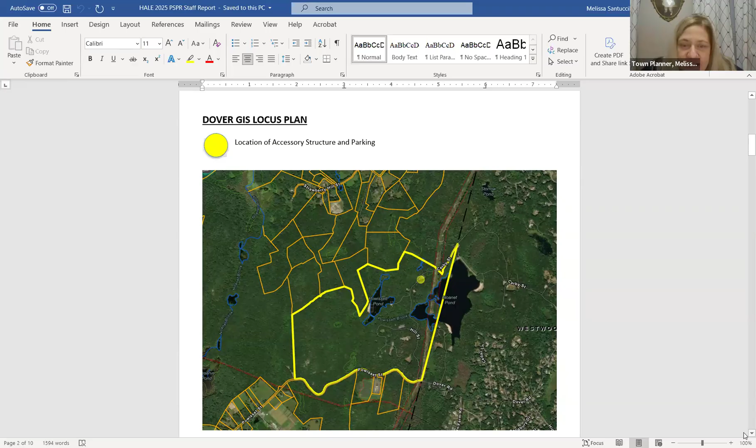I've included here in the report for everyone, it's such an expansive property. There was a lot of information in the application materials circulated. If you can see on this page, this yellow dot is the general area where this particular project is going to take place.

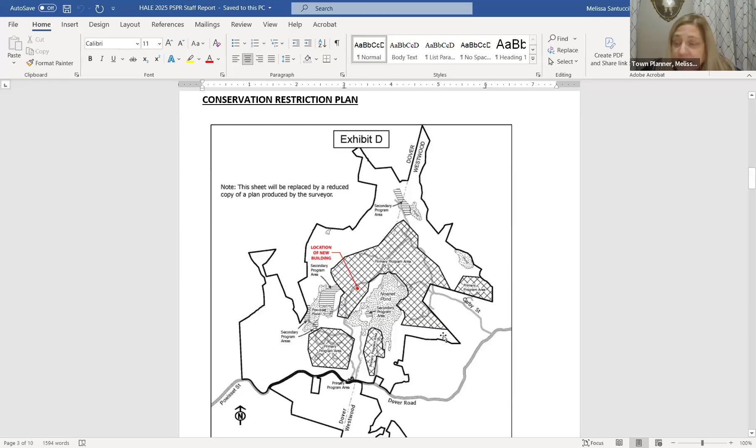Also included here, there's a lot of talk in the community about the conservation restriction, something both Hale and the community of Dover and Westwood are focused on. This Exhibit D is right out of the draft conservation restriction, and you can see I've asked them to highlight the location of the new building, which is in the primary program area. There are areas restricted as typical conservation restriction area, and others described as primary and secondary program areas, all highlighted here on this plan.

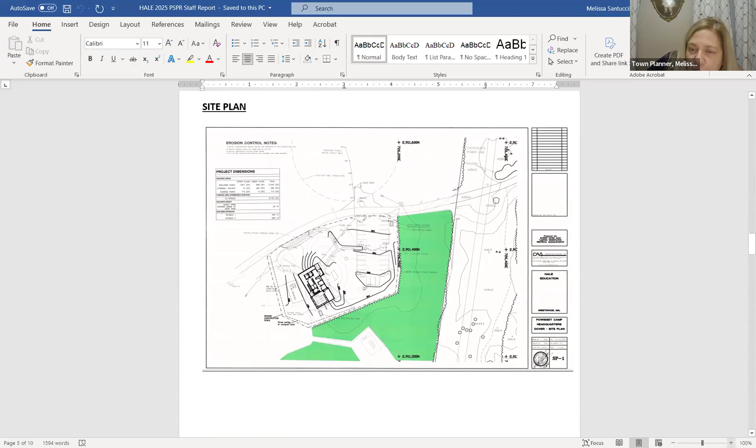This document, also provided in the packet to board members, is essentially the site plan. Over to the right you can see the Eversource power line easement for reference of location, and this green area here will remain the tree line and untouched. We have the 23 parking space area here.

Initial discussions were about gravel, but they may in fact pave that area, and they've provided drainage if they decide to pave. I did some rough calculations on coverage for this parcel, which is over 300 acres, and the increase in lot coverage was 0.000 - so de minimis, not even worth including in any analysis given the expansive area.

We have a series of walkways. Handicap and ADA access has been looked at in detail by the engineer to get up to the building, which you'll enter on the first level, about 2,000 square feet as I described earlier. Then the back area here, you enter into the lower level.

They're hoping to not have to remove any trees, though there could be slight tree removal in the field, or slight shifting of the footprint to avoid removing trees. However, there is no clearing proposed in the setbacks of the lot. The closest property line to the north is about 520 feet, and to the south it's well over half a mile - very interior to the piece of property we're looking at this evening.

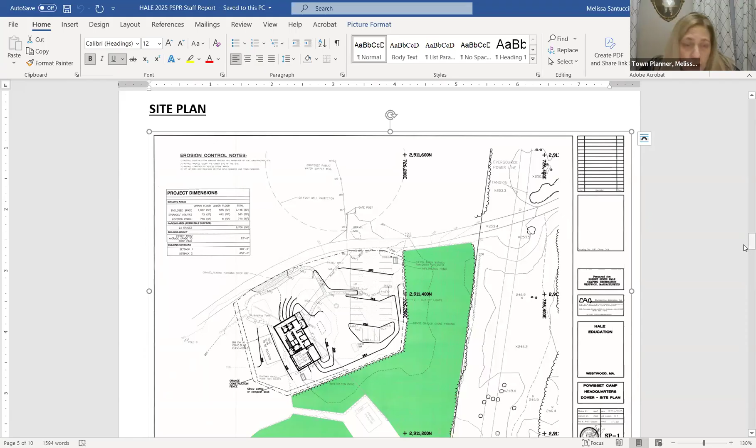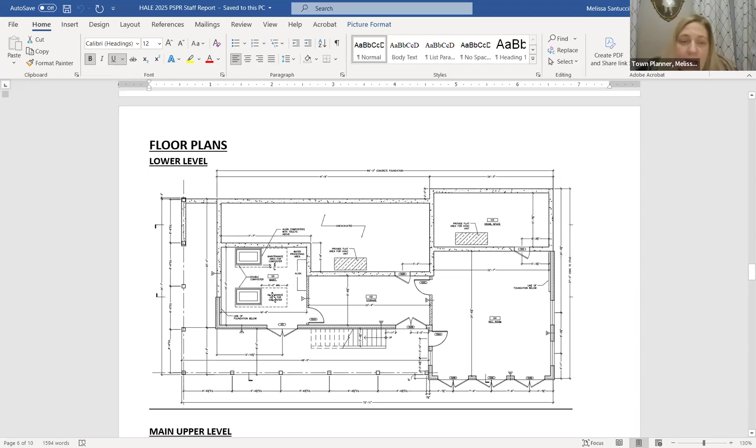We also have to talk about the floor plans. This is the lower level, with some unexcavated areas and a crawl space. We have a rec room down here on the right with beautiful barn doors that open onto the property, a storage area, and a utility area for the composting toilets they'll be using inside the building - another green eco technology that's part of this project.

We have the main level here on the second floor plan, with the main entrance into a reception area. We have offices for staff and counselors, a small conference area, the infirmary, some storage, and the lavatories I spoke about earlier. So a pretty small building, not a lot of wasted space, very efficient layout. The architect's done a great job addressing the needs of the facility at this location.

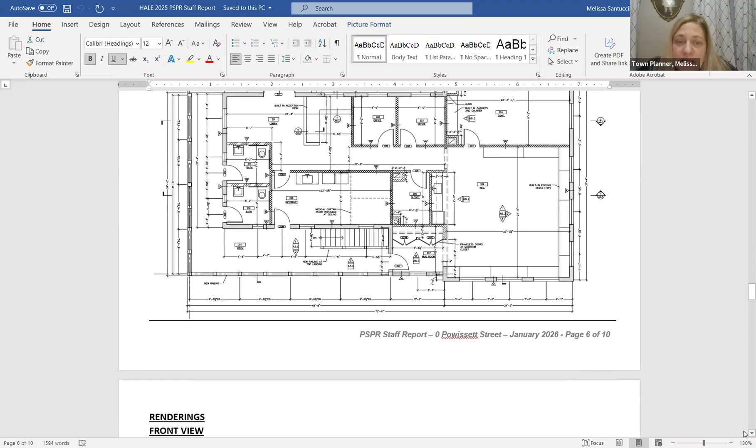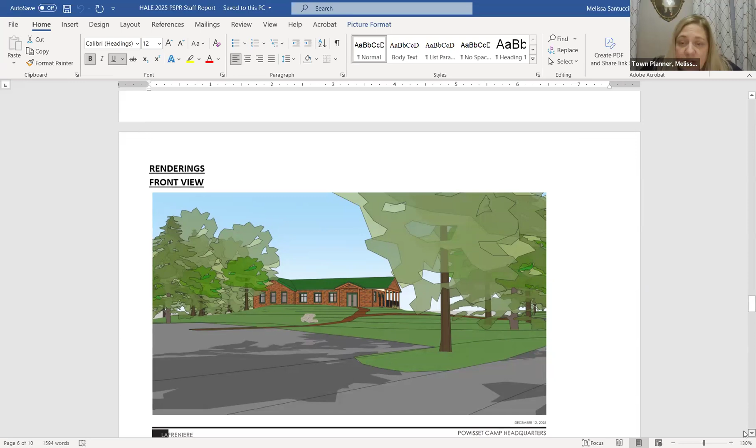And then really the showpiece is the renderings - log cabin, absolutely beautiful. This is the front rendering, as if you're coming into the parking area, where you'll enter into the main level of the building. We also have the rendering in the back with those entrances and nice barn-style doors for the recreation area, whether it's gathering or activities with the kids, nice and open with a lot of fresh air flowing in through there.

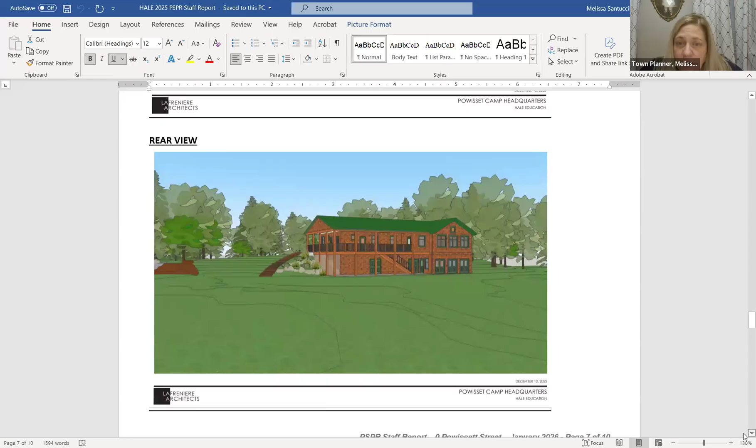So, wonderful job on the elevations. And then we get into the findings, which are straight out of the zoning bylaw. These things take into account compliance with the bylaw.

As noted previously, we're looking at a 300 or so acre parcel. There are no concerns about coverage. The building meets the height limitations. Parking is sufficient in accordance with the 1 space per 100 in our zoning bylaw. Lot size, obviously, very oversized lot. A lot of the things that would come into play given the size of the property are essentially non-issue, compliant, and meet and exceed any dimensional criteria.

The second set of findings the planning board looks at is the location of the driveway openings in relationship to street traffic, convenience, safety, pedestrians, bikes, any way anybody would be getting in and out of this particular place. I had looked at some maps, and correct me if I'm wrong, but I think you'd get on Carby Street in Westwood and make your way onto something called Brune Way that showed up on one of the plans. That's essentially how you'd get here. This particular building is located in the parking area off of Brune Way.

Again, sufficient parking in this area. It's likely to see a small increase in pedestrian, bicycle, and vehicular activity to this particular location on the site, obviously, with a new building and new parking. However, there aren't really any concerns about creating any unsafe or inconvenient situations. It's very interior to the property, not a situation where we have multiple curb cuts or multiple people trying to access different locations in this area of the site.

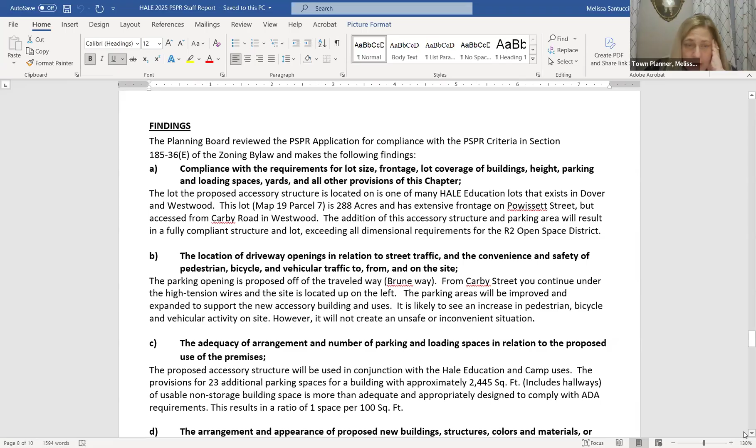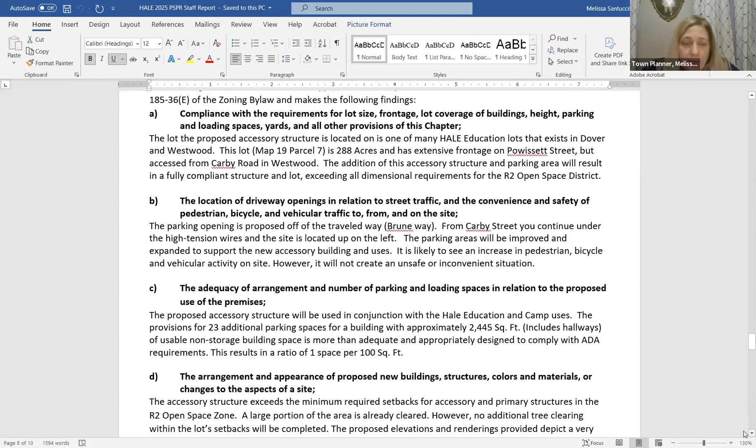The proposed accessory structure, in conjunction with the Hale Education and Camp uses, provides for 23 additional parking spaces. I did some quick calculations, and while the total square footage is over the 1 per 100, we typically don't park for storage areas and things like that. So 23 parking spaces is more than sufficient for this size building in accordance with our bylaw.

The next set of findings is the arrangement and appearance of the proposed new building structures, colors, and materials. As we showed in the renderings earlier, the building is beautiful, essentially a log cabin type of appearance, very in keeping with the camp and natural theme we have going on here. The area in question is a great area for this building. A lot of it has already been cleared, and they're using the topography to their advantage to build the building into the slope, taking advantage of removing fill, cuts, and grading. So great location and good site design, both from the architect and the civil engineer on this one.

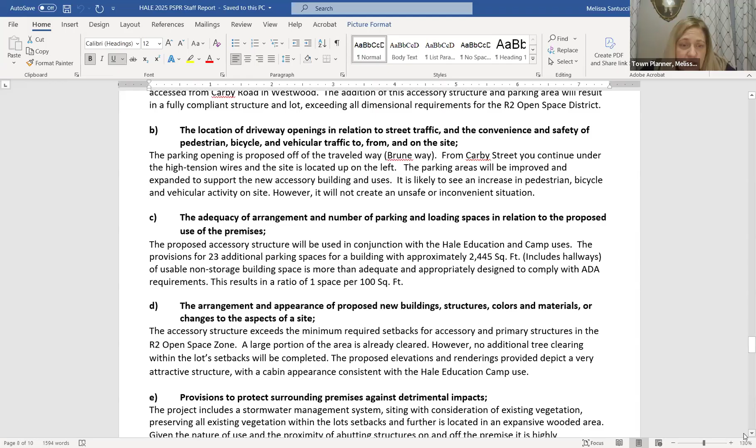The provisions to protect the surrounding premises against detrimental impacts — the only ones that would really be impacted are themselves, and really there are no concerns. Around this particular building is expansive wooded area. The engineer has also included a stormwater management system; we'll be infiltrating 100% of the roof's clean runoff back into the ground. There are also additional catch basins and infiltration associated with the parking area, in the event they use a hard packed gravel surface or a paved surface.

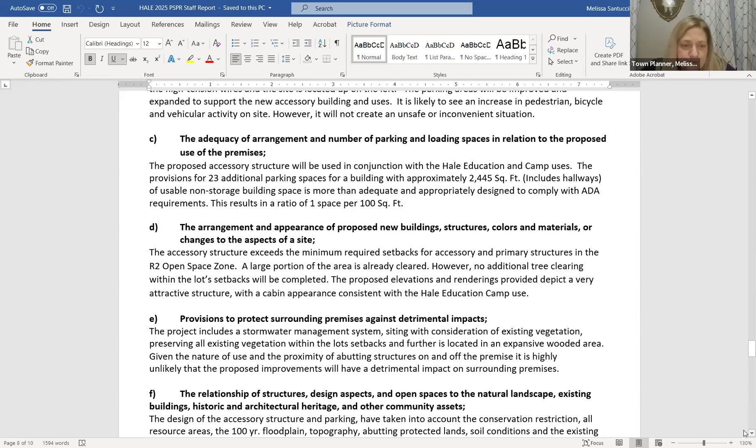There are a lot of different resources out here, as everybody's aware, and again they've taken into account being out of any resource buffer areas, out of the floodplain. I mentioned the topography and that they're using that to the design's advantage. They've done some test pits to get an idea of groundwater levels and soil conditions — that's all checked out. Also, the location, size, height, and use of this particular building jives with the draft conservation restriction.

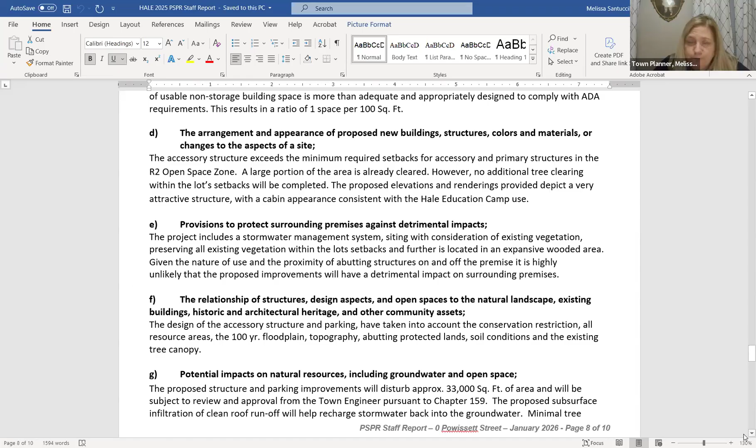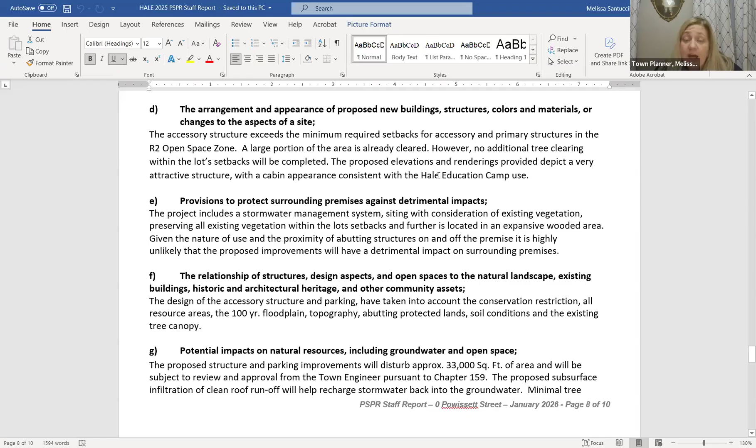The last item is the potential impact on natural resources, including groundwater and open space. As mentioned in some of my previous comments, this area is largely cleared, which will help with minimal tree removal. And then there's the stormwater recharge, which is paramount in keeping our groundwater levels where they are. So, a couple other benefits to the project as well.

Potential impact on town resources, including protective agencies, streets, and public spaces. Again, very deep into the expansive property that they own, looking at the conservation restriction as something benefiting the public and being a town resource, having that area restricted. We see no impacts and conflicts at this time with that particular language.

We look to make sure the building isn't going to be incongruent or inappropriate in character. Again, all of the materials submitted look great. The site plan looks great. The elevations look great, the floor plans, everything really checks out and lines up with what they're looking to do at the property and the intent.

I don't see this as a situation where there's extra building space or unneeded provisions, or any type of accessory features like the parking. Everything jives and makes sense, and seems like it will really serve Hale Education without being excessive in nature. Last but not least, we look for full compliance with the bylaw, and the accessory structure and parking area complies with all other requirements in the zoning bylaw.

I can pause there, Carol. I'm sure there might be some questions, and I know the folks are here. We have a bunch of folks from Hale with us this evening, and then we can get back into it after we have some discussion.

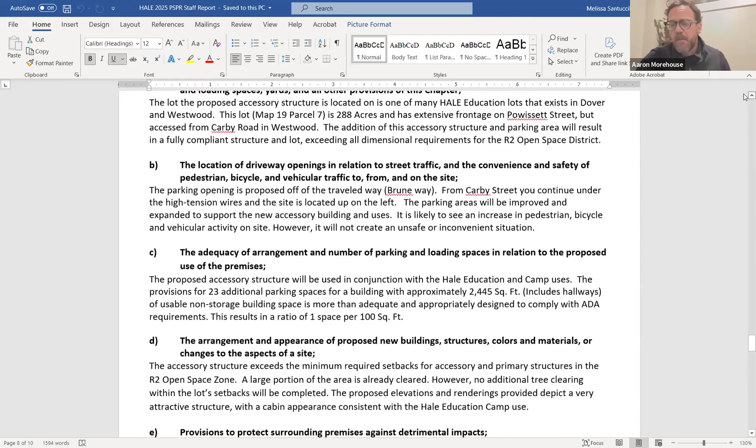No, our partners at the trustees know of this project. It's been in conversation with the trustees and within Hale for a couple years now. Before my arrival, this building was being talked about. And it falls within the primary program area, which has the allowance for this much higher level of construction as far as square footage and impact within primary program areas that are in the map that Melissa shared earlier.

No concerns there, no concerns from our legal counsel on moving forward on this project and being able to have the CRs approved. Aaron, I appreciate that, and I hope it's the same answer, but we've got Nina on the phone. I was wondering if Nina can just say she agrees with it, and we can just move on.

It's Nina. Dave, it's Nina Green from the Green Warren Committee. Oh, not well, I'm sorry. Nina Pickering Cook, our town counsel. I only used to live across the street. Never mind.

But that still then is an open question in my mind. I just want to make sure that we're going to grant, sorry, we're going to grant the building permit, but the CR is not even submitted to the state yet. So are we ahead of ourselves?

So your question is, are we only ahead of the process? Because when we get into the conditions of the decision, you'll note that condition 10 addresses your concern, which basically says this whole thing is contingent upon it being valid within the final and approved CR. So we'll get to that in detail when we get to it. Wonderful. Carol, I'm happy, I just wanted to ask the question.

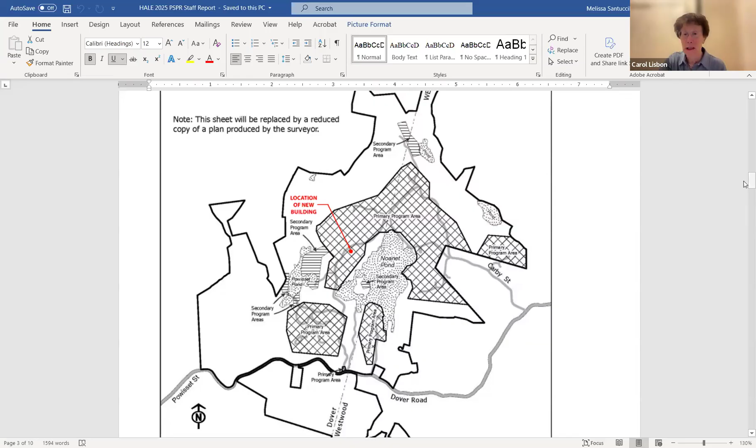Coming down the final stretch. Are there any other questions now about the building itself or any of the actual plans for the building and the parking lot? Seeing none, I think, let me go through that. Seeing none. Okay.

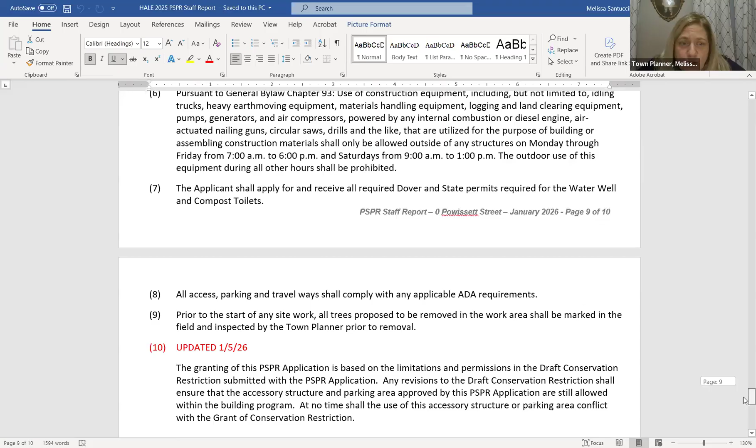Jody, would you like to make the motion? Sure. Thank you. Excuse me, Carol, before we get into the motion, I just want to bring people's attention to condition number 10, which I did update earlier today, again just making sure that everyone's on the same page with the conservation restriction. The planning board members didn't have a chance to see this aside from the chair. It was drafted late today. Basically it all says the granting of the preliminary site plan review application is based on the limitations and permissions in the draft conservation restriction submitted with the preliminary site plan review application.

And what Aaron was explaining is there is an inventory of what is there, and then there's permissions and limitations on what can be built. This new building is coming out of the what-can-be-built-in-the-future category. So there's no double dip situation, it's not something that's going to be put in there that isn't recognized. They're essentially eating into their future building allowance with this building that we have in front of us this evening.

Any revisions to the draft conservation restriction shall ensure that the accessory structure and parking area approved by this preliminary site plan review application are still allowed within the building program. At no time shall the use of the accessory structure or parking area conflict with the conservation restrictions. So it's in everyone's best interest, especially Hale, to keep that language in there. I provided the full draft conservation restriction to everybody, so if you wanted to do a deep dive, there's a section that talks about what's there and what can be built in the future based on the primary and secondary program areas. I just wanted to make sure this wasn't missing from the draft I shared with the Hale team, the planning board, and the Board of Selectmen - belts and suspenders here to make sure everyone is moving forward with the same premise.

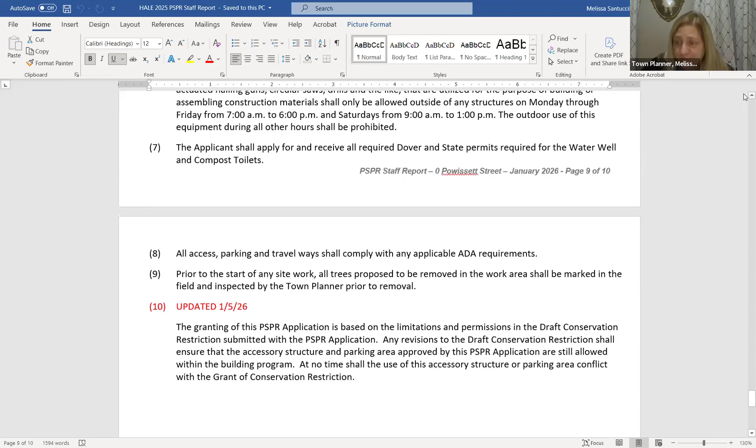Thank you, Carol. Thank you, Melissa. And thank you for getting that wording done so quickly - it was about an hour and a half ago we talked about it. Thank you very much. Any other questions before we go on to the motion?

In that case, Jody, you're on. Okay, so am I reading all the conditions as well? Yes, please. Oh, amazing. Okay. Do you have a glass of water before? Ready, go. My teacher voice.

I'd like to make a motion to approve the preliminary site plan review application for the accessory structure and parking area and all supporting materials referenced in section 2 of the staff report dated January 2nd, 2026, with the conditions contained therein, and further to recommend favorable action to the Board of Selectmen.

1. Prior to the issuance of a building permit, minor modifications to the approved site plan and supporting materials may be approved administratively by the Planning Board Chair.

2. Upon completion of the project, future modifications or additions to the accessory uses and structures shall be subject to compliance with the zoning bylaw and may require additional review and approval by the Planning Board and Board of Selectmen.

3. All lighting associated with the parking area shall not spill or glare onto any adjoining property.

4. Prior to the start of any on-site work, the applicant shall file for, comply with all requirements, and obtain all permits pursuant to general bylaw, stormwater management and erosion controls, Chapter 159, as required by the Department of Public Works, including all project review required by the town engineer.

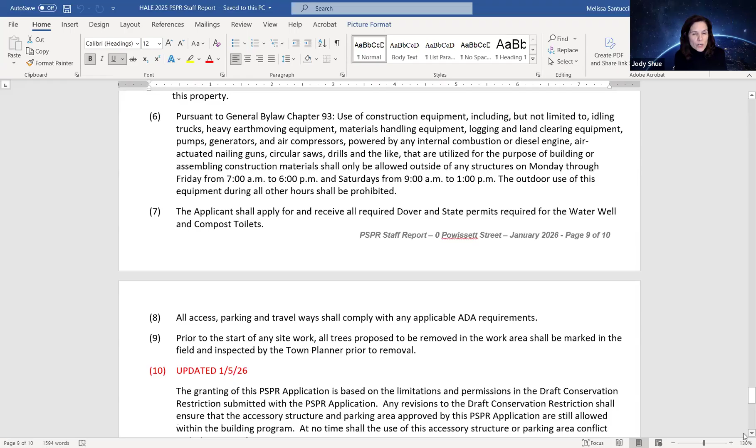6. Pursuant to the general bylaw, Chapter 93, use of construction equipment, including but not limited to idling trucks, heavy earth moving equipment, materials handling equipment, logging and land clearing equipment, pumps, generators, and air compressors powered by any internal combustion or diesel engine, air-actuated nailing guns, circular saws, drills, and the like, that are utilized for the purpose of building or assembling construction materials, shall only be allowed outside of any structures Monday through Friday from 7 a.m. to 6 p.m. and Saturdays from 9 a.m. to 1 p.m. The outdoor use of this equipment during all other hours shall be prohibited.

7. The applicant shall apply for and receive all required Dover and state permits required for the water well and compost toilets. 8. All access, parking, and travel ways shall comply with any applicable ADA requirements.

9. Prior to the start of any site work, all trees proposed to be removed in the work area shall be marked in the field and inspected by the town planner prior to removal. And 10, updated January 5th, 2026.

Melissa, I don't think I have to reread that one, unless you want me to. No, I think I'm good. Okay, you read it good. Absolutely. And I can't see anything below, so I think we're good. There we go. Okay, do we have a second?

Second? Thank you, Val. Are there any further comments or questions before we take a vote on the motion?

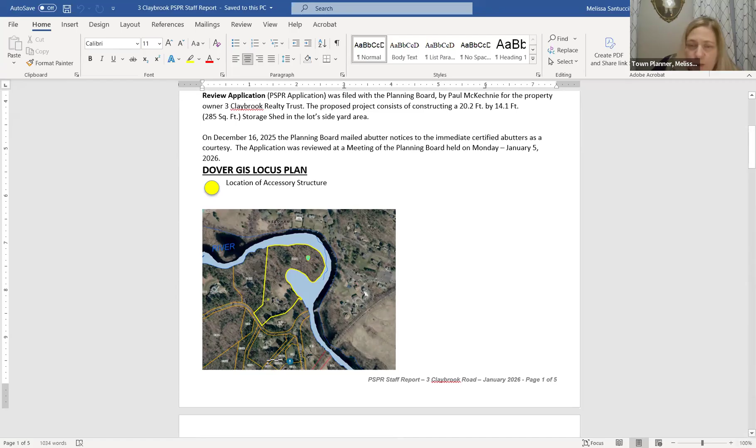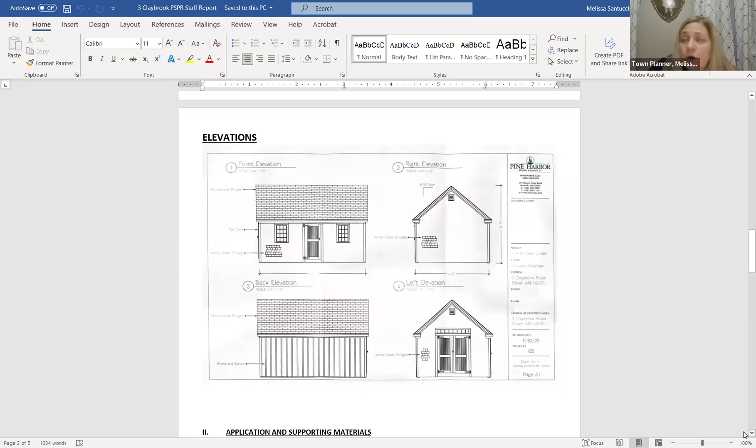This is nothing more than a shed to be used for storage. Paul's provided some nice elevations from Pine Harbor. We're going to have cedar shingles, PVC trim, architectural shingles to match the exterior of the dwelling on the property. There are no utilities whatsoever, no power, no water, nothing going out to this property. I'm assuming it's going to be used for some yard materials and whatnot. I can imagine what's needed to maintain this property is fairly extensive.

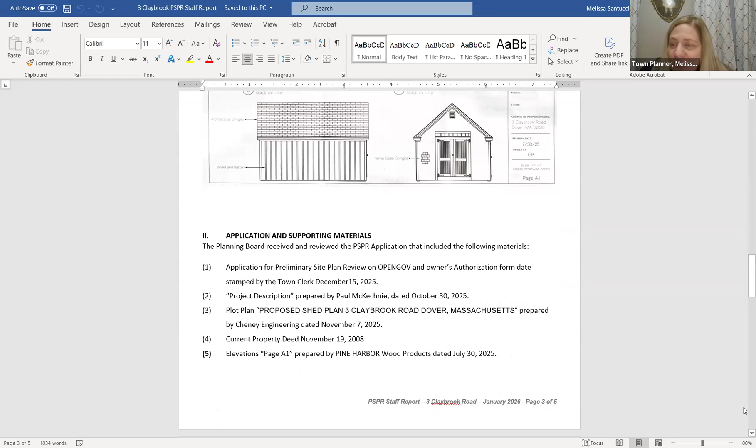We have a short list here of materials. Paul was caught right in the middle of the transition into OpenGov, so he was the first person who got his materials uploaded, and everything looks great there.

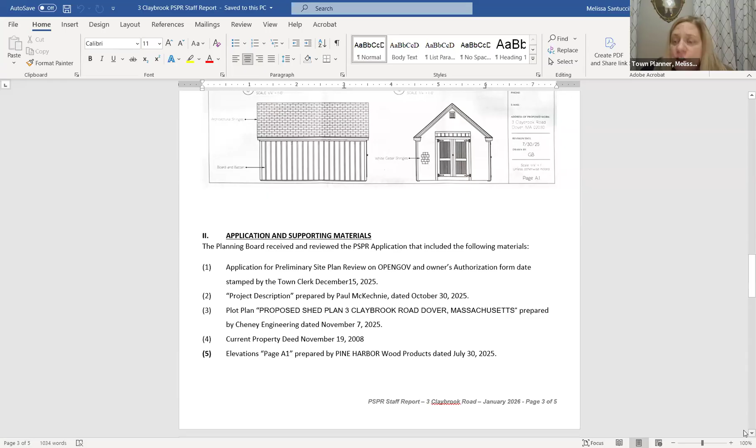We have the deeds, the elevations, the plot plan, and a nice narrative that describes the construction. Then we get into our criteria here, the site plan review criteria. This, being a 285 square foot shed, really does not come close to impacting barely any of this criteria.

We're in the R2 zone. There is a portion of the property in the Conservancy District in the rear, and also some in the Groundwater Protection District. The driveway opening is existing, there won't be any changes, and they'll be using that for the construction.

Not applicable, I put down for the arrangement of parking spaces and loading. There is not going to be any excess vehicles associated with the shed on the property. As I noted earlier, the shed exceeds not only the setbacks for an accessory structure, but also a primary structure, being located almost 50 feet off the property line.

No additional tree clearing will be completed as part of this. There will be some shrubs relocated in order to get this shed on the property. It's used for storage, no utility connections. There's really no opportunity here for impacts to their property or any abutting properties.

The design of the shed with the board and batten siding and white cedar shingles will serve to complement the expansive dwelling. They have also taken into account the resource areas and the topography, staying out of the conservation portion of the lot. So they picked a great portion of the property that isn't going to require any additional permitting or impact any of those resource areas mentioned.

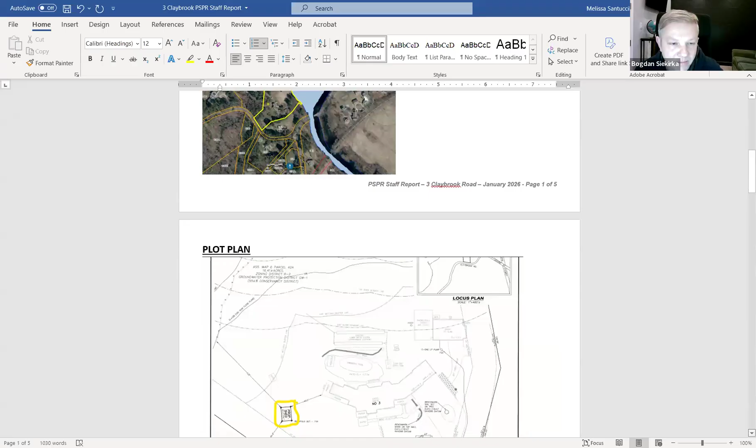Yeah, on the map there's no— it doesn't show the existing shed. It does, the existing shed is just above that. Hold on, let me move my cursor. I believe it's this tiny one here. Do you see that little square?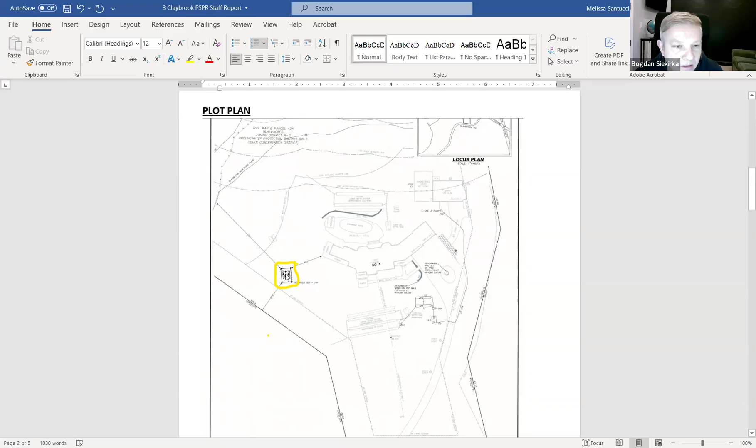Oh yeah. So the new one is bigger than the existing one and it's much closer to the property line. Correct. It's about— let me zoom in. I can't, let me see if I can see that dimension. If I can find it.

Yeah, I have Carol— let me see, I have the plot plan here, which might be a little bit clearer. Yep, let me just get down here. Yeah, there we can see it, sir. 49.8 feet. And no trees or anything will be removed as part of this shed.

But I also don't believe that they're doing any additional screening. Okay, so essentially both sheds will be used for, like, any machinery to do the landscaping or anything like that?

So the two sheds will be used for— I can't speak to the existing shed, sir, but I can tell you that the one that the planning board approved tonight is for storage. Yep, and there's no utility connections, so there's really no opportunity to do anything more inside there than store equipment, and that's how it was relayed— that it was for storage.

Okay, well, thank you for attending tonight, and our apologies for not seeing your hand raised earlier. That's all right, thank you.

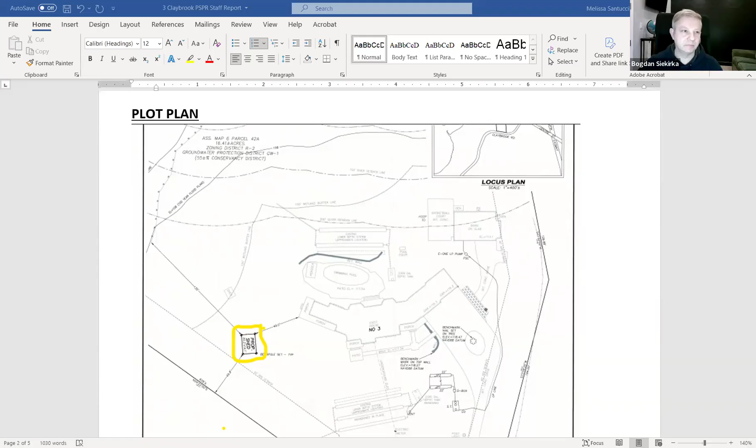Okay, so with that, we're going to go on to the next item, which is item 2B, for Melissa to just give us a quick update on the operating budget. Yes.

So at the last meeting, I presented the budget to the board, and also we were fortunate enough to have our warrant committee representatives with us as well. The day after the meeting, I submitted all the materials to Mr. Blanchard as we were instructed to, and that afternoon, a memo had come out that there was a small error in the salary calculations spreadsheet that was provided to us.

So I wanted to make sure everybody had that. And again, this was what was submitted on behalf of the department and the planning board to Mr. Blanchard.